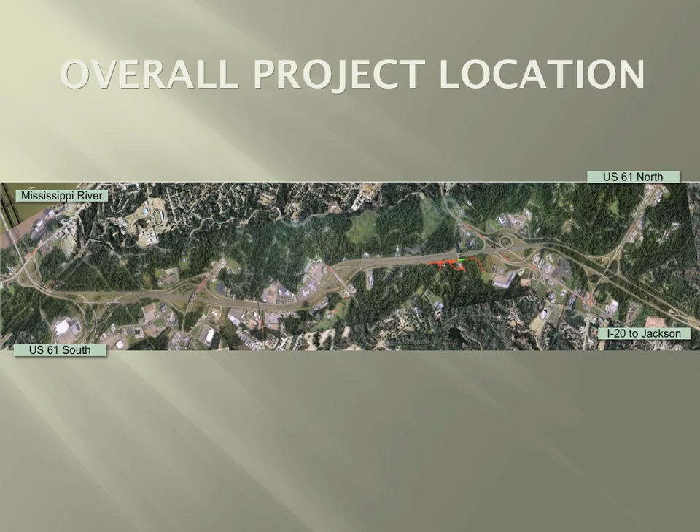Due to the complexity and overall cost, MDOT recommends the reconstruction be completed in phases by several projects. To maintain heavy traffic volumes, the projects are being planned in a sequence that will allow each project to function independently and maintain connectivity throughout the entire route.

Two build alternatives are being presented at this meeting. They have very similar concepts for reconstructing the mainline interstate and the interchanges. The proposed reconstruction for both alternatives will include improving the frontage roads and placing them in one-way operation. I-20 traffic will then be detoured to the frontage roads while the mainline lanes of interstate are closed for reconstruction. After the mainline interstate is reconstructed and reopened to traffic, Alternative B will retain the frontage roads in one-way operation, while Alternative C will return the frontage roads to two-way operation.

Due to time constraints, this video presents only Alternative B that will retain the one-way frontage road. For more information on the two-way frontage road Alternative C and the differences in the two alternatives, please see the project team representatives after you view this video.

As we discuss each project, you will notice some areas of the roadway highlighted in red and green colors. Red indicates new construction or improvements to the existing roadway. Green indicates new bridge construction or improvements to existing bridges.

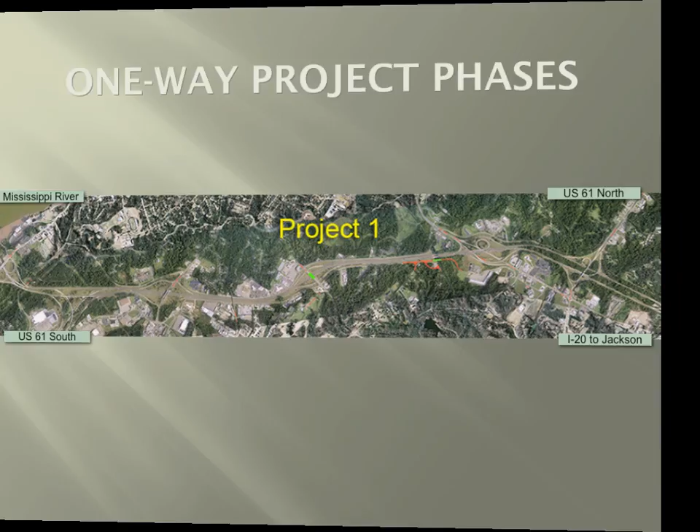Project 1 will raise the Indiana Avenue Bridge over I-20 to provide additional clearance over the interstate to satisfy current requirements. This project will not change traffic movements.

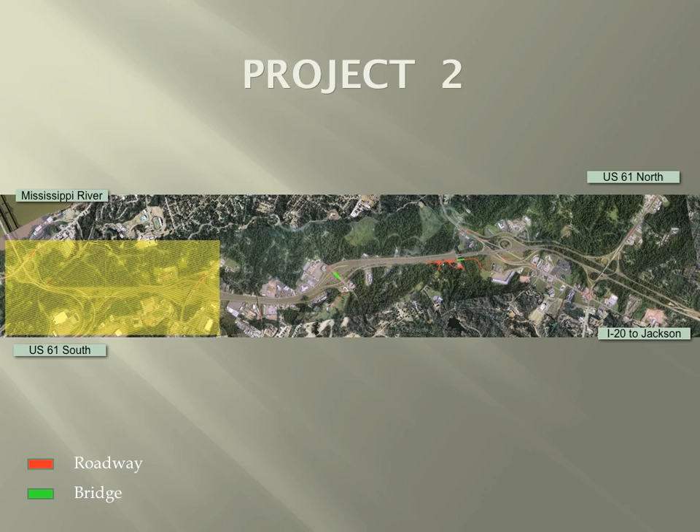Project 2 will reconstruct I-20 from the east side of the Washington Street-Warrenton Road interchange through the west side of the Halls Ferry Road interchange. The project includes the reconstruction of the U.S. Highway 61 South interchange and most of the Halls Ferry Road interchange. This construction will dramatically improve access to and from I-20 for U.S. Highway 61 South and Halls Ferry Road motorists.

Instead of taking a left exit to enter U.S. Highway 61 South, drivers traveling westward on I-20 toward the Mississippi River will exit to the right onto a new bridge that will take them up and over all lanes of I-20 and directly on to U.S. 61 South. Drivers traveling eastward on I-20 will experience only a slight change due to design improvements in the existing right exit ramp to U.S. 61 South.

For drivers traveling northward on U.S. 61 wanting to go west on I-20 towards the Mississippi River, a bridge will be constructed over the interstate and loop to the right, enabling drivers to enter I-20 in the outside lane. This improvement will make access to the Washington Street-Warrenton Road interchange much safer by eliminating the existing entrance ramp onto the inside lane of I-20.

Travelers on U.S. 61 bound for I-20 East will now exit U.S. 61 in the left two lanes, passing beneath the new bridge provided for the U.S. 61 North to I-20 West maneuver, and then enter the two outside lanes of I-20 East. The outside lane will be dropped as an exit only at Halls Ferry Road. Traffic in the adjacent lane can exit or continue east on I-20.

At the Halls Ferry Road interchange, improvements in Project 2 will include construction of a new entrance loop to I-20 westbound, replacing the existing I-20 west entrance ramp. Travelers northbound on Halls Ferry Road, destined for I-20 west, will travel over the interstate and exit from the outside lane onto the new loop and enter I-20 west in the outside lanes.

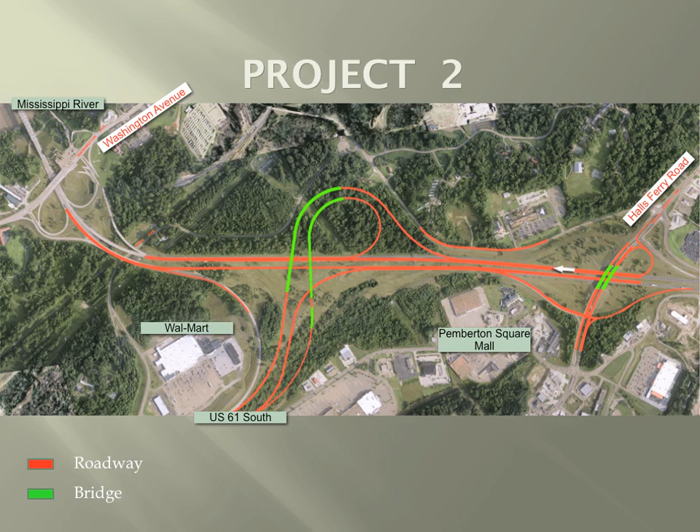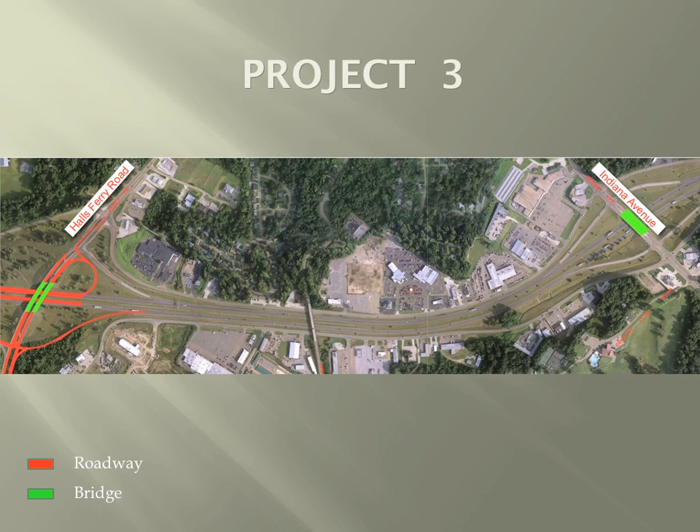Project 4 will reconstruct I-20 from the Halls Ferry Road interchange to the Indiana Avenue interchange. This project will convert the frontage roads between these two interchanges to one-way operation. It will also include reconstruction of the portion of the Halls Ferry Road interchange that was not included in Project 2, and reconstruction of the western portion of the Indiana Avenue interchange.

Drivers traveling south on Indiana Avenue destined for I-20 West will turn right on the North Frontage Road and then quickly exit the frontage road to the reconstructed on-ramp and enter I-20 West. Drivers traveling north on Indiana Avenue destined for I-20 West will cross over I-20, then turn left on the North Frontage Road and then access the reconstructed I-20 West on-ramp.

Travelers southbound on Indiana Avenue destined for the South Frontage Road between Wisconsin Avenue and Indiana Avenue will turn right onto the North Frontage Road and proceed to slightly east of the Halls Ferry Road interchange, where a circulation loop beneath I-20 connecting the North and South Frontage Roads will be provided. After crossing beneath I-20, travelers can proceed east on the South Frontage Road to their destination.

Drivers traveling east on I-20 exiting to Indiana Avenue will exit on the right and travel on a new ramp to an intersection with the South Frontage Road, where a traffic signal will be provided. These exiting drivers will then proceed east on the South Frontage Road to Indiana Avenue.

Drivers traveling north or south on Halls Ferry Road that desire to proceed east on I-20 towards Jackson will experience only a slight change in the reconstructed entrance ramp. The entry maneuver to I-20 will utilize the existing ramp corridor, but additional length will be provided to aid the on-ramp traffic in their acceleration and merging.

Drivers traveling on Halls Ferry Road destined for the North Frontage Road between Wisconsin Avenue and Halls Ferry Road will turn onto the reconstructed on-ramp to I-20 East. They will then exit the ramp onto the South Frontage Road and proceed slightly east to the new circulation loop connecting the South and North Frontage Roads. After crossing beneath I-20, travelers can proceed west on the North Frontage Road to their destination.

The current exit location to Halls Ferry Road from I-20 West will remain. However, the exit ramp will be reconstructed to meet current design standards.

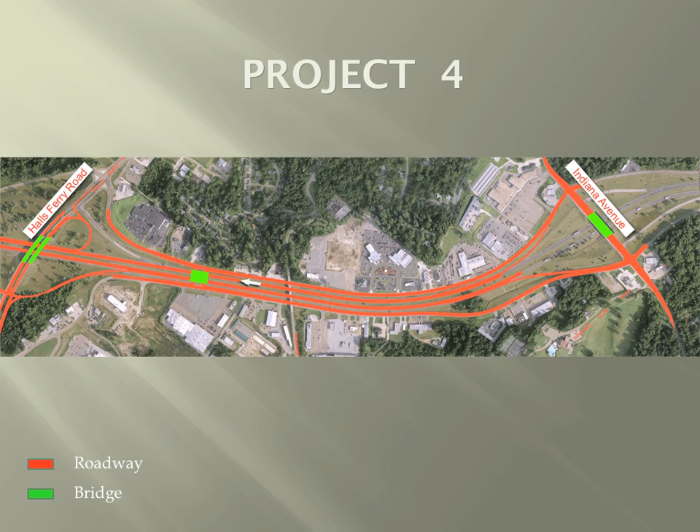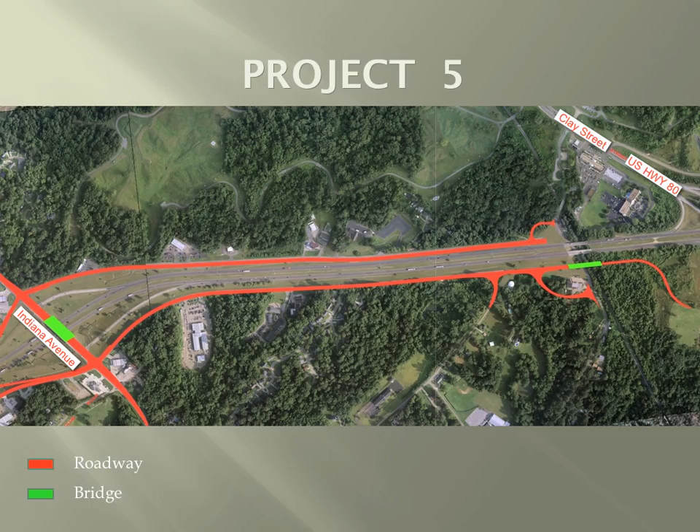Project 5 will reconstruct and widen the North and South Frontage Roads to 3 lanes between the Indiana Avenue Interchange and the old SR-27. Project 6 will construct some of the frontage roads, collector-distributor roads, and bridges between old SR-27 and the eastern side of the Clay Street US 80 interchange.

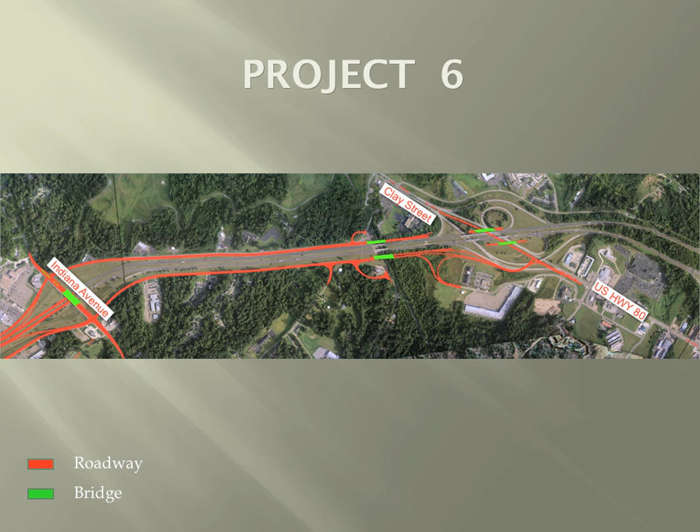The project will widen the northbound lanes of Clay Street US 80 within the interchange, close the southbound lanes, and route both directions of Clay Street US 80 traffic on the widened northbound lanes. The ramp and flyover bridge from Clay Street southbound to I-20 East will be removed. This project will also include slightly relocating and reconstructing the I-20 East exit ramp for US 80 to accommodate closing the I-20 East right exit loop to Clay Street.

Drivers desiring to proceed south on Clay Street through the interchange will travel on the widened northbound lane corridor. Travelers southbound on Clay Street from downtown that want to proceed either east on I-20 towards Jackson or north on US 61 towards Redwood will travel south on Clay Street US 80 to the US 61 North SR-27 signalized intersection, turn left, and then make a quick right onto the I-20 East interchange ramp, or proceed straight ahead to US 61 North. Drivers traveling east on I-20 that desire to proceed on US 80 will experience only a slight change in the relocated and reconstructed exit ramp.

Travelers proceeding east on I-20 desiring to exit on Clay Street for downtown or Military Park will take the relocated, reconstructed US 80 exit ramp to the Clay Street US 80 signalized intersection, turn left, and proceed straight through the interchange. Drivers traveling east on the I-20 South Frontage Road to the road servicing Vicksburg factory outlets, Clay Street, US 80, or I-20 East will cross over SR-27 and the KCS Railroad, then turn right to the Vicksburg factory outlets area, or continue east past the exit to enter the I-20 East exit ramp to Clay Street, US 80.

Where these drivers can then turn left to Clay Street, proceed straight to I-20 East, or turn right to US 80. Drivers wanting to access Clay Street, I-20 East, or US 80 from Vicksburg factory outlets will no longer have to use Berryman Road. These drivers can continue west on the City of Vicksburg's frontage road and turn right onto the I-20 South Frontage Road, which is one-way eastbound.

From this frontage road, the drivers will enter a new exit ramp from I-20 East and proceed to an intersection with Clay Street US 80, where they can turn left to Clay Street, proceed straight to I-20 East, or turn right to US 80.

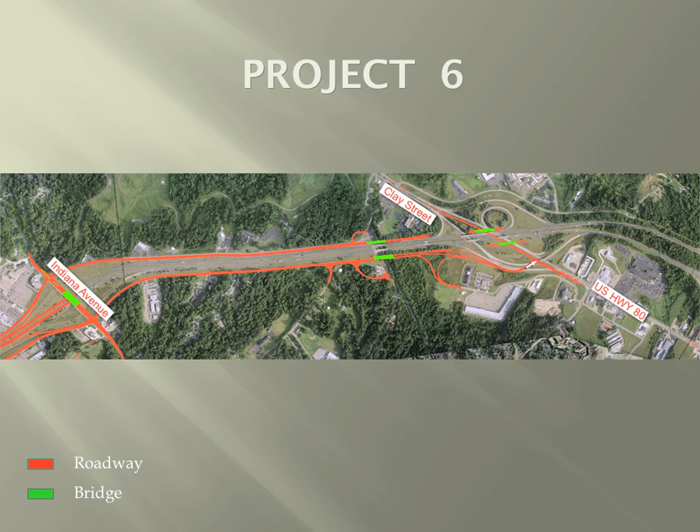Project 7 will complete the reconstruction of I-20 between the Indiana Avenue interchange and the eastern side of the Clay Street US 80 interchange. The project includes completion of the Indiana Avenue interchange and most of the Clay Street US 80 interchange.

The north frontage road will be extended to the east over Old SR 27 and the Kansas City Southern Railroad as a collector-distributor road.

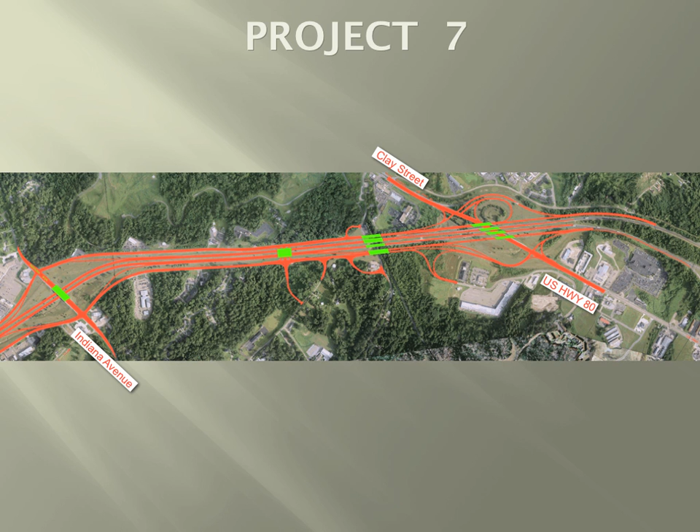The south frontage road will also be extended to the east over Old SR 27 and the Kansas City Southern Railroad, providing access to Vicksburg factory outlets, and continue easterly as a collector-distributor road. The frontage roads and the collector-distributor roads will have one-way operation.

Drivers traveling north on Indiana Avenue desiring to proceed east on I-20 towards Jackson will turn right onto the south frontage road and then quickly exit the frontage road onto a reconstructed I-20 east on-ramp.

Drivers traveling north on Indiana Avenue destined for the north frontage road between Old SR 27 and Indiana Avenue will turn right on the south frontage road and proceed east almost to Porter's Chapel Road, where a circulation loop beneath I-20 will connect the north and south frontage roads.

This loop will align with a new connector to Porter's Chapel Road. After crossing beneath I-20, travelers can proceed west on the north frontage road.

Drivers traveling east on I-20 desiring to exit at Clay Street US 80 will exit to the South Collector Distributor Road, travel over Old SR 27 and the Kansas City Southern Railroad on the new bridge, and then exit onto a ramp that will intersect Clay Street US 80 at a signalized intersection.

Drivers traveling south on Clay Street from downtown Vicksburg destined for the south frontage road between Porter's Chapel Road and the Vicksburg factory outlets will turn right and proceed west on the North Collector Distributor Road over the KCS Railroad and Old SR 27 to where the North Collector Distributor Road becomes the North Frontage Road.

Slightly west of Old SR 27, these drivers will turn left onto a circulation loop beneath I-20 that connects the north and south frontage roads and aligns with a new connector to Porter's Chapel Road. After crossing beneath I-20, these travelers can proceed east on the south frontage road.

Drivers traveling west on I-20 that desire to exit at Indiana Avenue will exit to the right on a new ramp that will merge with the North Frontage Road. The North Frontage Road Indiana Avenue intersection will be signalized and provide for movements in all directions.

Drivers traveling southbound on Clay Street from downtown Vicksburg that desire to proceed west on I-20 will proceed on the reconstructed and widened section of Clay Street US 80 to the north side of I-20, turning left at a signalized intersection with the loop ramp to access the North Collector Distributor Road.

Drivers traveling west on I-20 from Jackson to a destination on Clay Street in downtown Vicksburg or a destination on the 5-lane section of US 80 between I-20 and SR 27 will exit to the right onto the new North Collector Distributor Road.

They will then exit the Collector Distributor Road to the right on a partially reconstructed Clay Street US 80 ramp. At a new ramp signalized intersection with Clay Street US 80, drivers will turn right for their Clay Street downtown destination or left for their US 80 destination.

Drivers traveling north on the 5-lane section of US 80 desiring to proceed east on I-20 towards Jackson will turn right to a new on-ramp and enter I-20 east in the outside lane.

Drivers traveling north on the 5-lane section of US 80 desiring to proceed west on the North Collector Distributor Road and North Frontage Road will proceed north underneath the Interstate on the joint Clay Street US 80 corridor and turn left on the north side of the interchange to the North Collector Distributor Road.

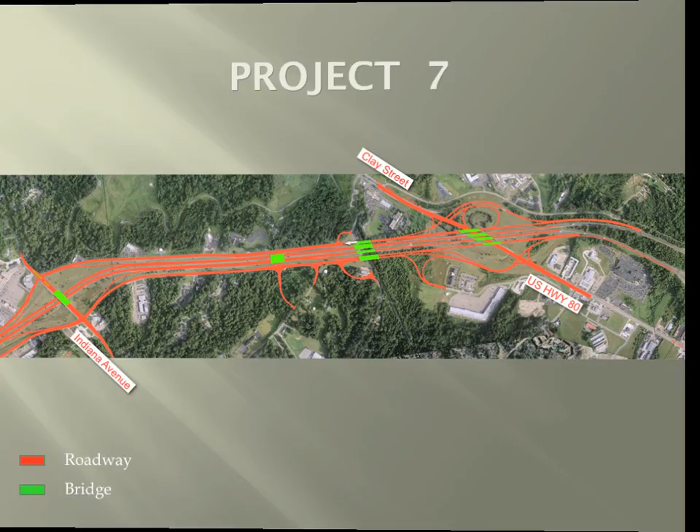Project 8 will reconstruct I-20 between the Clay Street US 80 interchange and the eastern limit of the US 61 North SR 27 interchange, and reconstruct the segment on the eastern side of the Clay Street US 80 interchange not included in Project 7.

The project will extend the North Collector Distributor Road to the eastern limit of the US 61 North SR 27 interchange on an alignment incorporating the reconstructed westbound lanes as part of the North Collector Distributor Road.

Construct two new I-20 eastbound and westbound lanes in the median, and reconstruct the existing I-20 eastbound lanes as a South Collector Distributor Road.

Reconstruct US 61 to the north of the US 61 North Clay Street interchange, and reconstruct SR 27 to the south of the US 61 North SR 27 interchange to US 80.

The project will place the frontage roads and the collector distributor roads in one-way operation. Drivers traveling on I-20 west from Jackson who want to proceed south on SR 27 towards Utica will exit to the North Collector Distributor Road, take the first exit ramp from the Collector Distributor Road to a signalized intersection with US 61 North SR 27, where a left turn is required.

Drivers traveling on US 61 southbound from Redwood who want to proceed west on I-20 towards the Mississippi River Bridge will exit onto a new ramp to enter the North Collector Distributor Road. These drivers will continue west on the Collector Distributor Road and travel over Clay Street US 80 on a new bridge before exiting the Collector Distributor Road and entering I-20 west.

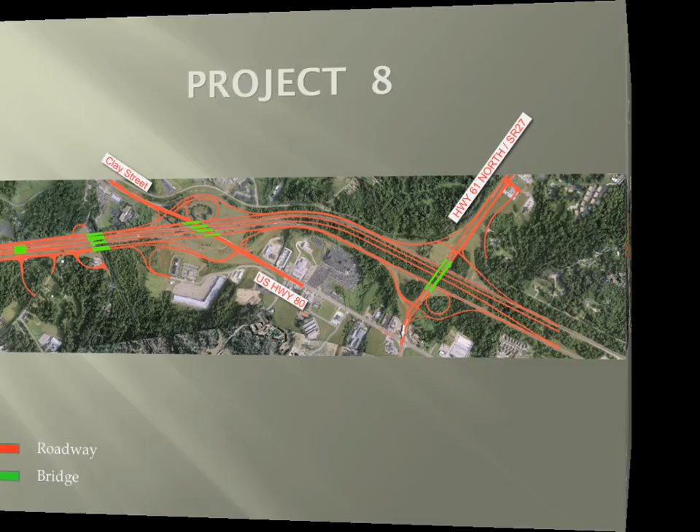Drivers traveling northbound on SR 27 from US 80 who want to proceed west on the North Collector Distributor Road will travel over I-20 on a new bridge to a signalized intersection where a left turn will be required to a ramp connector. The connector will enable these drivers to enter the ramp in the northwest quadrant of the interchange in an added lane, proceed southwest on the interchange ramp, and then enter the North Collector Distributor Road.

Drivers traveling southbound on US 61 from Redwood who want to proceed east on I-20 towards Jackson will travel over the interstate to an intersection where a left turn will be required to enter the ramp in the southeast quadrant of the interchange. The drivers will then enter the South Collector Distributor Road and remain on it as it proceeds east and merges with I-20 east.

Drivers traveling northbound on SR 27 from US 80 who want to proceed east on I-20 towards Jackson will make a right turn slightly north of US 80 to the reconstructed ramp in the southeast quadrant of the US 61 North SR 27 interchange. The drivers will then enter the South Collector Distributor Road and remain on it as it proceeds east and merges with I-20 east.

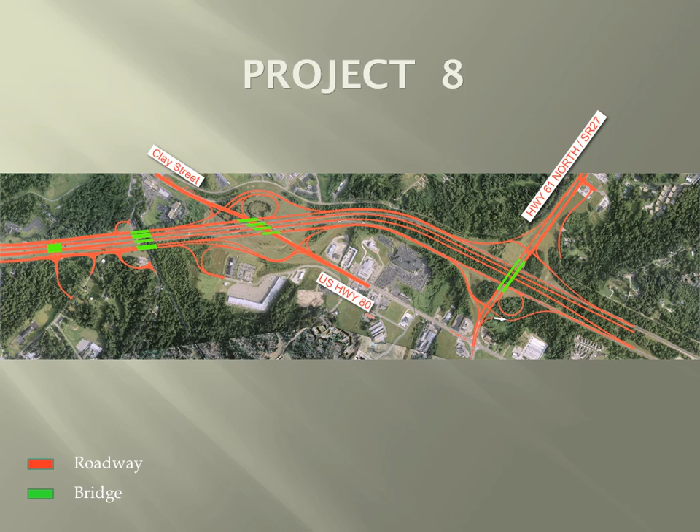In closing, the one-way and two-way frontage road alternatives, Alternative B and C respectively, are identical from the Mississippi River Bridge extending east to Halls Ferry Road, and from Clay Street US 80 extending east of US 61 North SR 27. For both alternatives, the frontage road collector distributor road system must be placed in one-way operation and function as a detour for interstate traffic while the adjacent interstate lanes are reconstructed. The main difference in the two alternatives is the reconstruction of the Indiana Avenue interchange and the reconstruction of the mainline interstate and frontage roads between Halls Ferry Road and Clay Street US 80.

For Alternative C, the two-way frontage road alternative, the frontage roads will be restored to two-way traffic operations after the adjacent interstate reconstruction is completed and the frontage roads are no longer used as detours for interstate traffic. For Alternative B, the one-way frontage road alternative, the frontage roads will not return to two-way traffic operation after the adjacent interstate reconstruction is completed. Due to time constraints, only the one-way frontage road Alternative B is presented in this video.